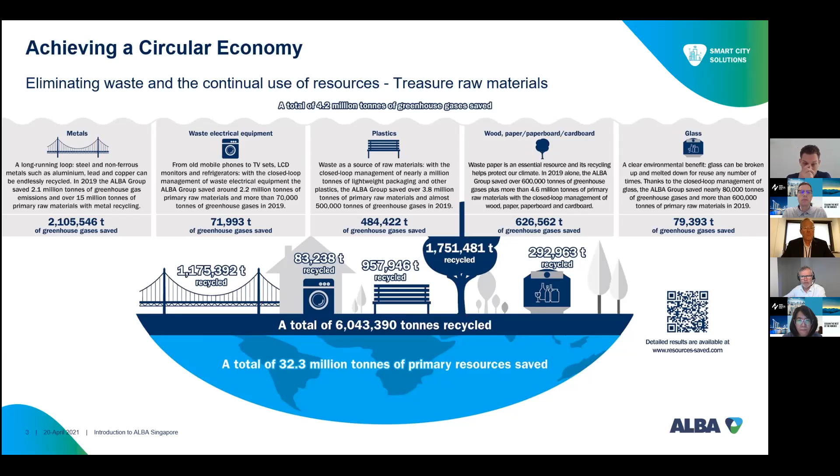And we see a trend towards sustainability, towards recycling more and more across the industry, across governments, and especially now in Asia. This is something we always like to highlight. Next slide please.

Specifically in Asia, we currently focus on 4 verticals, or business units: hazardous waste treatment, bio-waste treatment, plastics recycling, and what we call smart city solutions, which includes our Singapore operations. This isn't holistic - it's not the whole of what we do in Asia; we also do municipal waste treatment and end-of-life vehicle recycling, or automobile recycling. But these are the 4 core business units we're focusing on at the moment, where hazardous and bio-waste are currently mostly focused on China.

Plastics recycling facilities are being set up in Hong Kong and Japan, with plans to expand into other regions in Southeast Asia such as Indonesia, Vietnam, and Singapore. These first three business units are very much focused on recycling. These are all recycling plants that we operate, where we may have a collection infrastructure around that, but it's all focused on collecting the material and recycling it, then selling the output material produced from these three waste streams.

Finally, we have smart city solutions, which is broader. On one hand it includes all of our collection activities - sometimes we go into countries like Singapore and set up a collection network first before moving into treatment. This can be a first step, but it also focuses on our digitalization efforts, innovation, and anything we can do to modernize waste management and recycling processes as they had been used in the past. It also includes, for example, our newest project in Singapore, the producer responsibility scheme, where we manage the whole electronic waste landscape for all of Singapore. So that also falls under smart city.

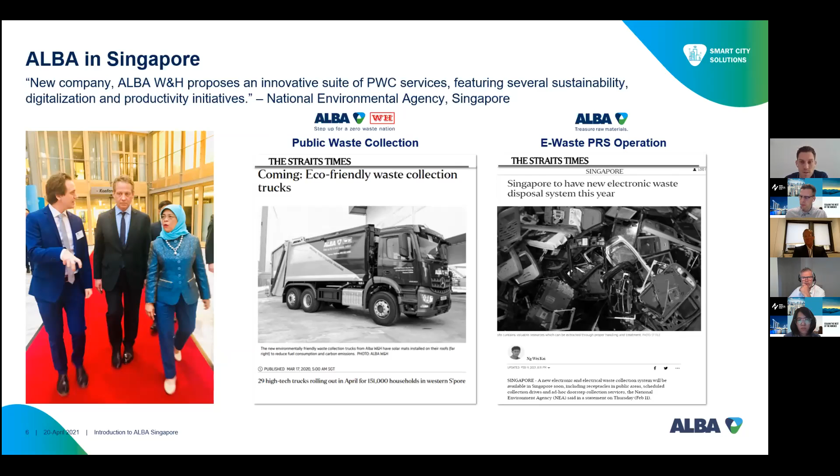Next slide please, Amirul. I won't go into too much detail, but this is the e-waste scheme - you basically just see what we are responsible for.

Producers sell to consumers. At the end of life, we have all of our different collection schemes, be it bins, collection drives, working with retailers, special events, so-called cash-for-trash events, and so on, to collect back the material, bring it to our hub, categorize it, weigh it, sort it, and then bring it to the different types of e-waste recyclers who specialize in all the different categories. And of course we also have to audit and consult them to make sure all hazardous materials are handled in an environmentally safe and friendly manner.

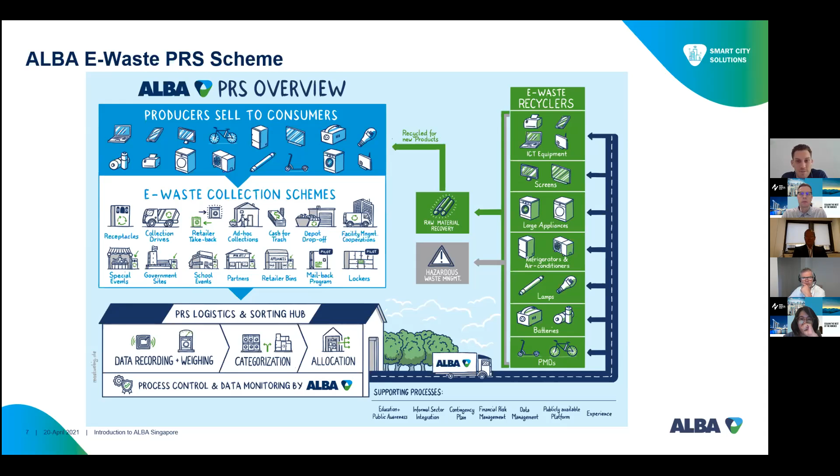That's in a very, very short just that project. Next slide, please. Okay, public waste.

I also talked a little bit about this. One thing that's important to mention again is that we really want to differentiate ourselves, certainly from the current landscape here, but from other waste management and recycling companies in general, by using new technologies and by making our own operations as green and sustainable as possible. So we've come up with a couple of innovations on the hardware side for our fleet.

All of our Euro 6 diesel trucks have solar mats on their roofs to harness solar energy, and we save about 5% of fuel consumption.

We have air filters on our trucks which take in the surrounding air, filter PM2.5 and PM10 particles, and then emit clean air. Finally, we have digital displays on our trucks, which in Europe are used for advertisements, but we use them for sustainability and recycling messages, and to create awareness for our recycling efforts.

And finally, on the next slide, we have developed an app that incentivizes recycling for Singaporean residents. We are expanding this as we speak. Starting 1st July, we will go island-wide. At the moment, it's only available in the sector where we do public waste collection.

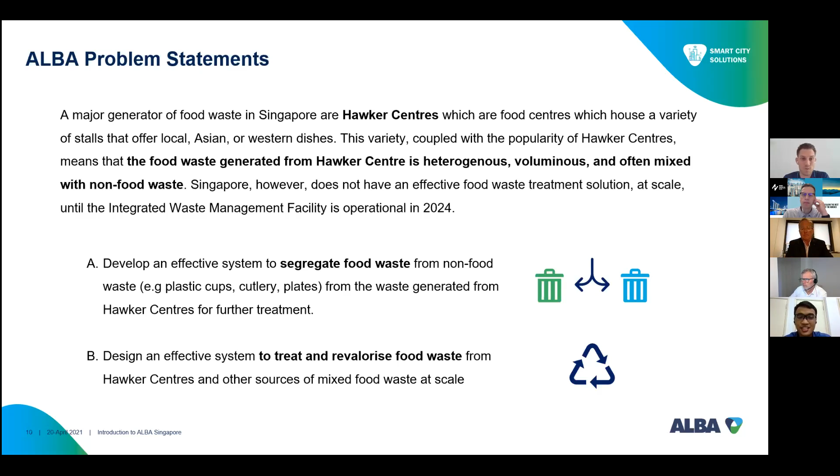To add on to what Amirul mentioned, the Singapore government is planning to build an integrated waste management facility that will probably come up by 2024. Leading to that, as a public waste collector, we would be forced to collect segregated food waste from major producers before this facility is ready. That's where the challenge begins, because first we have to collect segregated food waste. NEA has mandated that we provide separate bin units, which are brown in color, and educate hawker centers on proper segregation. But on top of that, we have to come up with an interim solution until the facility is up on how to treat this food waste. So that's another problem statement we're having.

One reference case we mentioned is the one we have in Berlin, at the city center, where we have this Potsdamer Platz facility, which takes care of almost 34 restaurants, 2 cinemas, many casinos, event spaces, and so on. The facility takes the waste underground, creating an invisible waste treatment, supply, and disposal center, and here we are also collecting food waste. We have a mini dehydration unit that receives 5 tons of food waste, which is fed into a dehydration and grinder unit that produces 3 fractions: the dehydrated food fraction, the water fraction, and the oil fraction. The food fraction is sent to biogas plants, the water fraction is purified up to sewer standards, and the oil fraction is sent to biodiesel facilities. So we are looking at innovative concepts like this that can be adopted in Singapore as well.

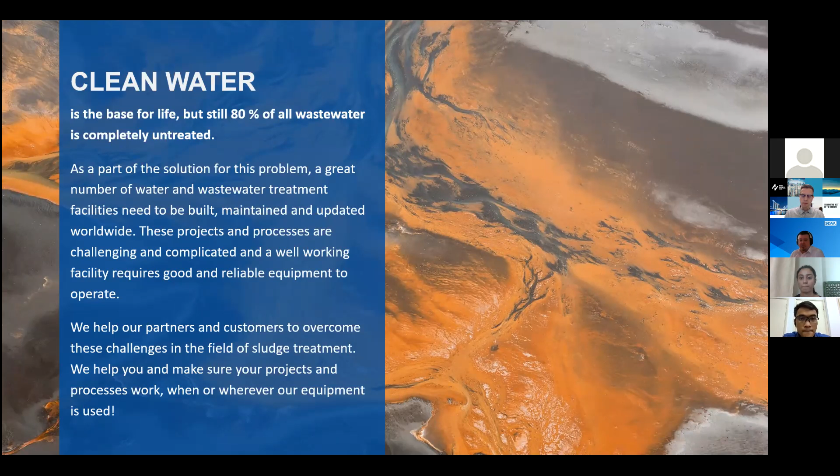Hello, my name is Toni Franti from Dewaco Limited. Thank you for this opportunity to present our company and offering. I'll begin with a short introduction. Clean water is the base for life, but still 80% of all wastewater is completely untreated. A great number of wastewater treatment facilities need to be built, maintained, and updated as a partial solution for this challenge. Good and reliable equipment have a very important role in this, and this is where we can help.

Under our DEWA brand, we design, manufacture, and sell equipment for sludge thickening, dewatering, and sludge removal. Effective sludge collection and dewatering is important in the fight to stop climate change and destruction of nature. It enables methods to reach sustainability goals and leads to circular economy by offering an alternative source for energy and other uses for the dewatered sludge cake. At least the collected matter is not directly released into nature.

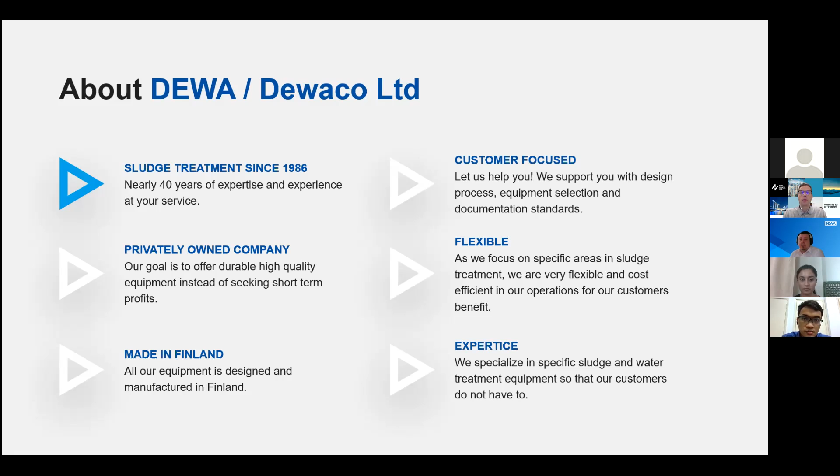We have 35 years of experience in sludge treatment. We specialize in manufacturing high-quality equipment that works as designed and promised, and we also offer supervision, installation, and after-sales services. Our equipment is made in Finland, and we operate under ISO 9001 standards. Our operations are based in Finland, but in many locations we are able to support our customers through our partner and reseller network.

For sludge and scum collection and removal, we offer chain and flight type chain scraper systems. These are the most sophisticated systems for sludge and scum removal. Our scrapers offer great benefits: optimal and minimum land and space use, higher removal efficiency, low capital and maintenance cost, and easy installation. Our superior design and non-metallic DEWA components offer top-class features, performance, and durability.

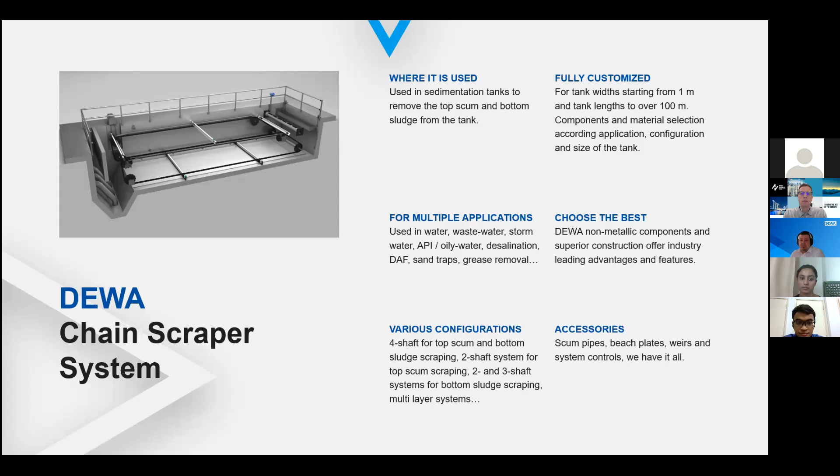These systems can be used in multiple applications such as water and wastewater treatment, oily water, desalination, DAF tanks, sand traps, and grease removal. We offer all possible configurations for rectangular basins, from top and bottom scraping to multi-layer systems, and supply all the needed accessories for these systems, including scum pipes, beach plates, and system controls.

In sludge thickening and dewatering, our solutions are based around belt filter presses and gravity belt thickeners. Belt filter presses offer great advantages such as low energy consumption, suitability for various applications, and relatively high sludge dryness. Total lifetime costs are extremely competitive.

Investment, running, and maintenance costs are low, and the presses have a very long lifespan. Reparations are rather easy, cheap, and do not require long standing times.

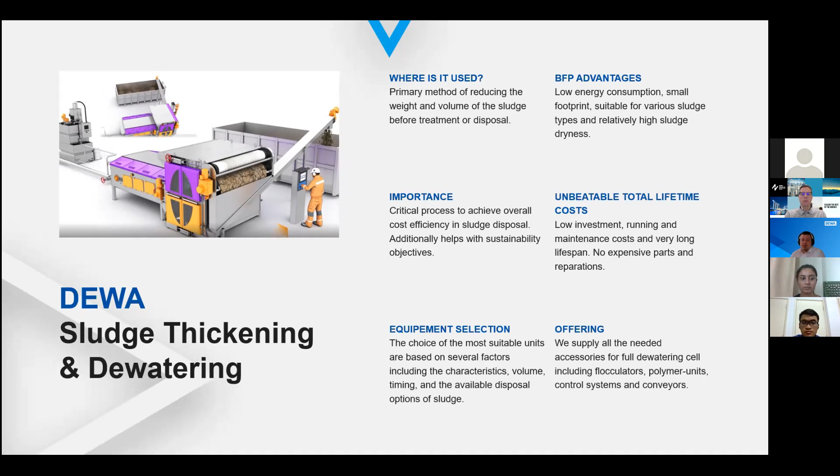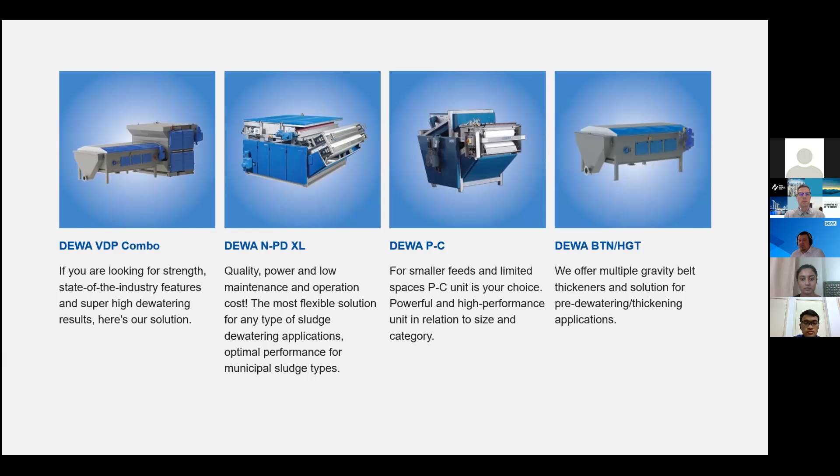Our portfolio covers solutions from small scale to high capacity municipal and industrial projects, all alternatively from cost-effective solutions to industry-leading features. We supply all the needed accessories for full dewatering cell, including flocculators, polymer units, control systems, and conveyors.

We are continuously developing our products. One of our ongoing development projects is to bring cloud-based and AI-assisted monitoring to our systems. This offers various benefits, such as decreased power consumption, extended system lifetime, and overall process optimization.

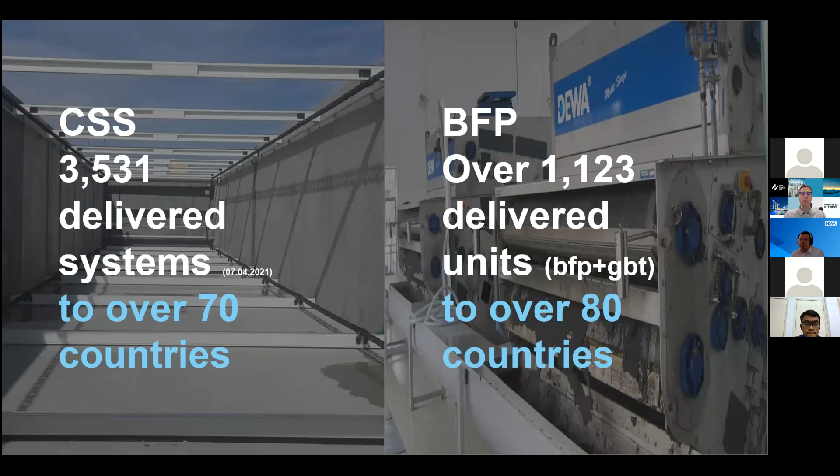Our track record includes over 3,500 chain scraper systems and over 1,000 belt filter presses and gravity belt thickener deliveries to over 80 countries. Next, I will show a few example cases.

Langat Centralized Sewage Treatment Plant in Malaysia is a mega project treating wastewaters coming from nearly a million people. For this project, we delivered 96 chain scraper systems and 48 scum pipes.

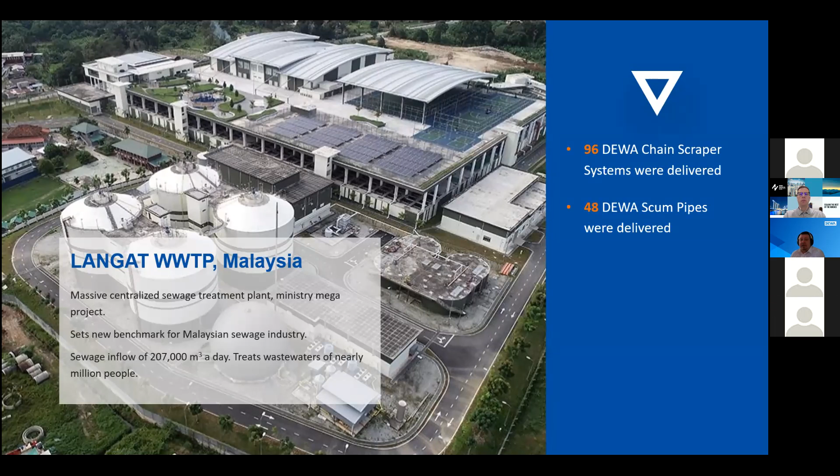Camana Sewage Treatment Plant is Maynilad's mega project in Philippines that will treat wastewaters from about 1.2 million households. Our full product portfolio will be used in this project for sludge and scum removal and dewatering.

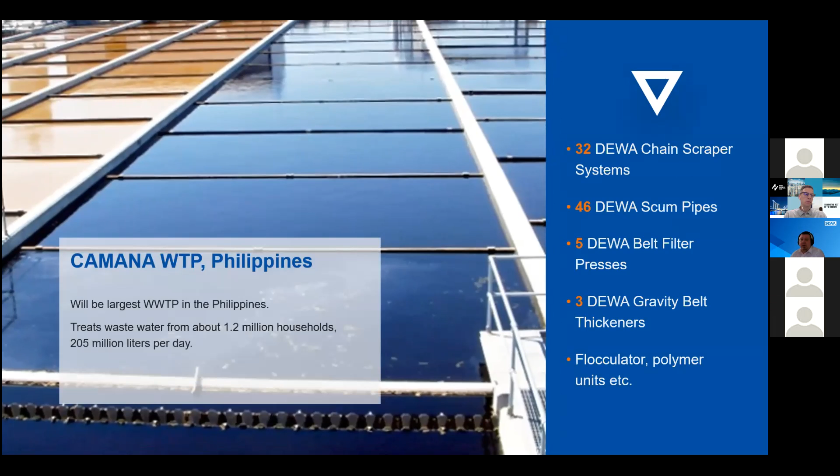I have our biggest and fastest growing market, China, as an example of a specific market area. I selected Wenzhou Wastewater Treatment Plant as an example case. For this challenging project, we delivered 24 two-layer chain scraper systems that help to solve the challenges with space limitations in a partly underground plant construction.

In order to showcase the business opportunities that our equipment offer, I want to mention Atal Engineering. Atal is one of our 6 resellers in China. This huge company is one of the leading Chinese electrical and mechanical engineering groups.

They began as our customer in a contractor role as they needed equipment for their own projects. Based on the successful and profitable projects, they have developed DEWA chain scraper systems and related services to be one of their actual business lines, stretching outside the typical contractor role.

We know that it takes much more than just good equipment to make the customer happy and reach a successful delivery project. Good products, overall quality, know-how, flexibility, accuracy, honesty, and right attitude are all needed to establish trustworthy partnership. Choose DEWA for smoother projects, better processes, overall cost savings, and cleaner future.

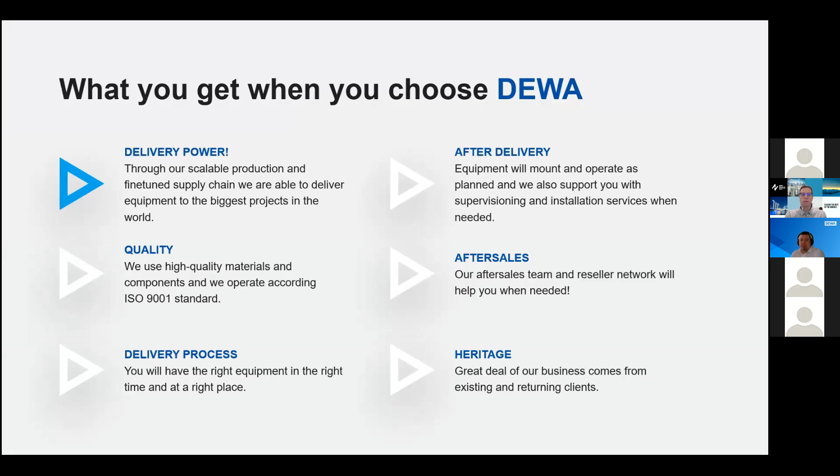We want to find new business opportunities, and we believe that many companies operating in this field can benefit from our offering. We can operate directly with end customers, but typically cooperation is done with contractors. Most importantly, we are looking for resellers to be our local partners. For this, we have great needs in Southeast Asia and in Singapore.

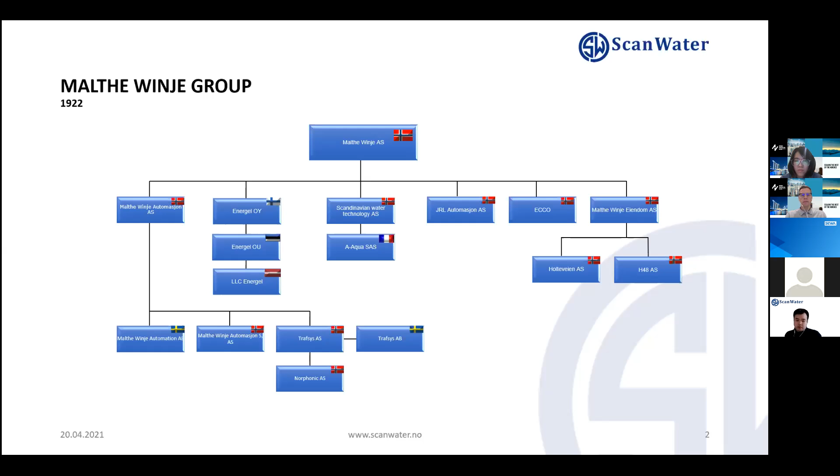What does Scan Water specialize in providing? We provide solutions in humanitarian aid and also municipality preparedness and water solutions. We developed together with the university within the CU Green project, a Horizon 2020 project. Increased urban population imposes higher environmental challenges to modern cities. At the same time, cities must optimize well-being and minimize environmental impact. In addition, through the current handling of organic household and toilet waste, on the one hand valuable resources are lost, and on the other hand it stresses existing infrastructure solutions.

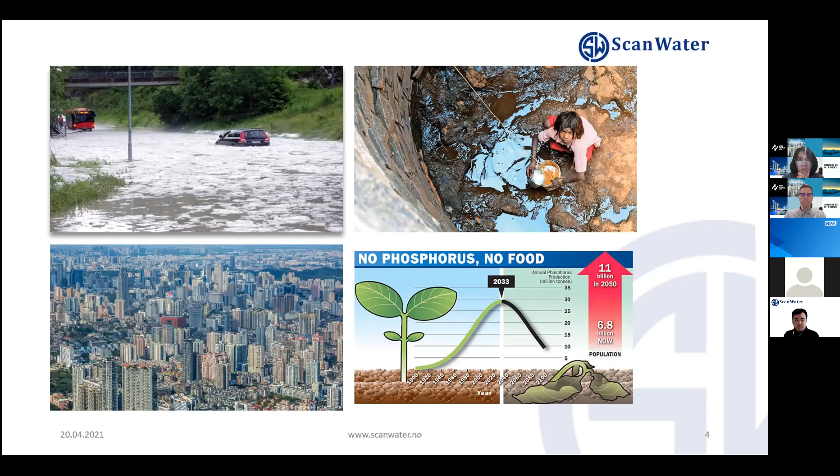But also, if not treated properly, it contributes to environmental pollution. So Scan Water conducted experiments on the development of an innovative water management solution called Greenergy. This Greenergy, under the CU Green project as mentioned, is a smart green solution for integrated water and sanitation, stormwater management, energy supply, and nutrient management in the city, based on the principle of resource recovery and safe reuse, aiming to increase the resilience of the city. It makes urban development more climate, environment, and human friendly with nearly zero emission, circular economy, low climate, and water footprint.

Elaborating a bit on the building infrastructure: Greenergy will reduce water consumption by using water saving fixtures such as vacuum toilets and reuse grey water source. It facilitates the recycling of nutrients to urban or peri-urban agriculture, and also eliminates pollution of surface water. Integrated with a biogas reactor, it will allow biogas production from toilet and organic household waste, delivering heat and power, and also nutrient retention to support greenhouse food production.

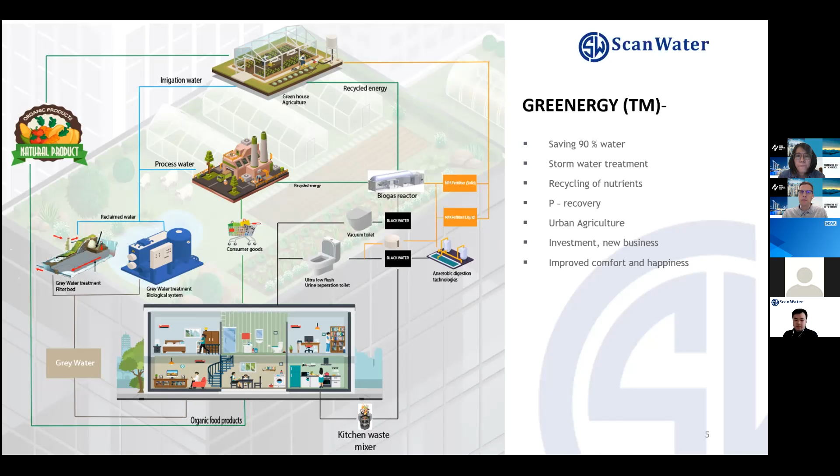The innovative element of Greenergy is the well-balanced combination of technology and social innovation that facilitates reduced water consumption, minimization of greenhouse gas emissions, and the promotion of reuse of CO2 and waste-based nutrients in the local greenhouse. So far we have pilot projects in different locations: 3 in China, with 2 projects in Beijing and 1 in Changsha, as well as one in Norway. We are looking for local partners who can develop the local market together with us. Thank you for that, that's my presentation.

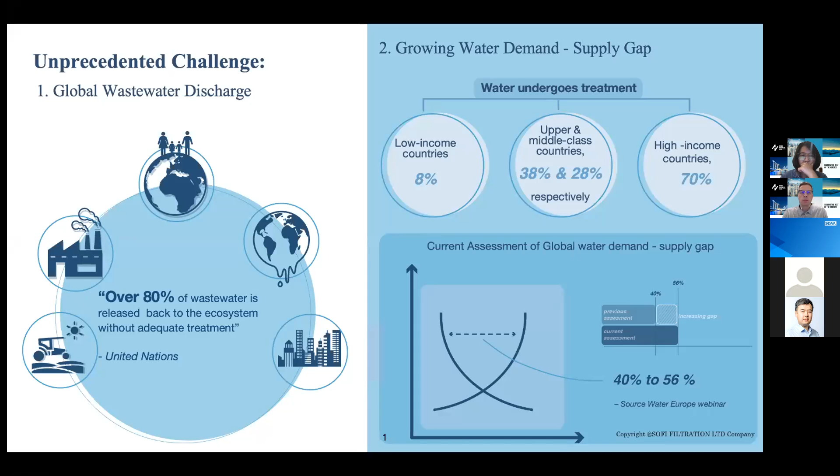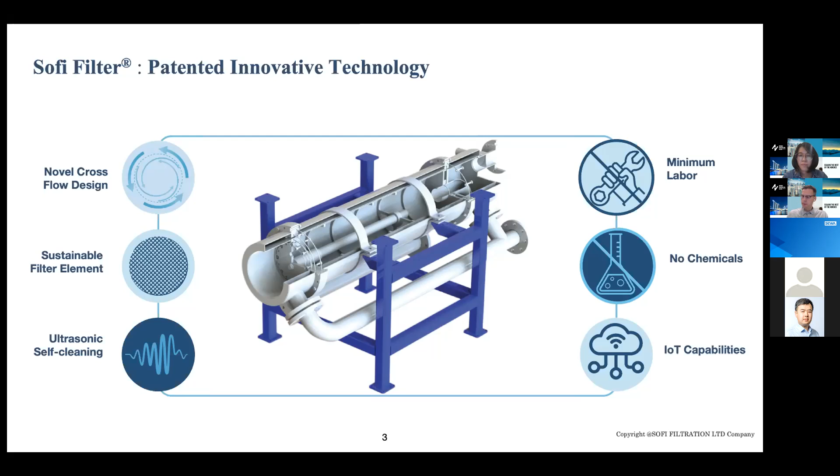Our technology has 3 unique features basically, and that's how we stand out from the other existing technologies in the market. We have the novel cross-flow design that accelerates the water inside the filter element. Then we have the sustainable filter element, meaning that we are using long-lasting filter elements, not any disposable cartridge filters inside our filter elements. And then we have the ultrasonic features, which automate the self-cleaning, meaning that we don't require any chemicals to clean the wastewater - so the only thing that runs inside the filter is water. We have also incorporated IoT capabilities to make our system more hybrid.

So this is the basic architecture of the remote monitoring and control I was talking about earlier, the IoT capabilities. The Sofi system is integrated with IoT features, and the system itself is connected to the wastewater treatment plant. With the help of that, the client and also us are able to monitor the data remotely, no need to be on site. So offline also it could be monitored.

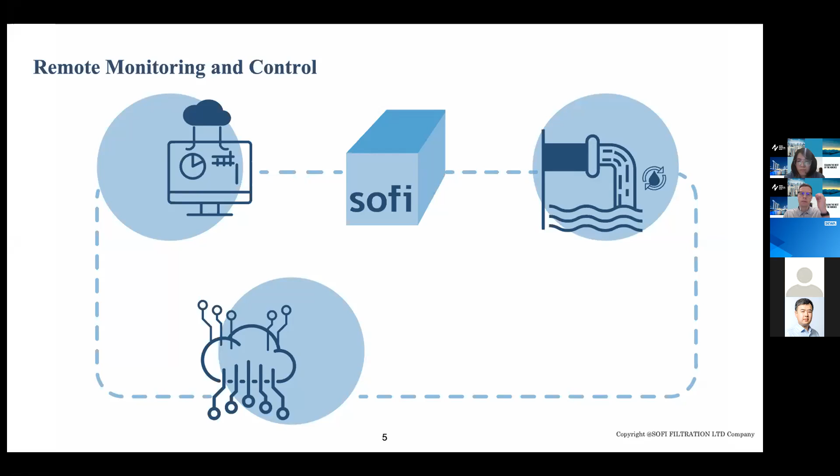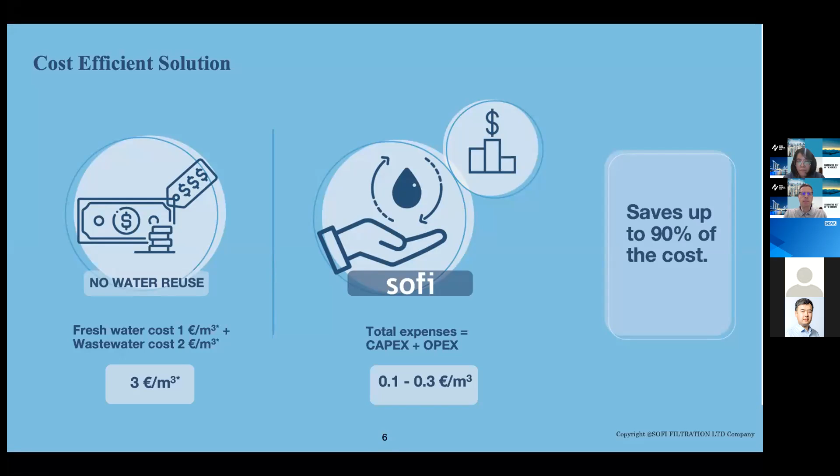Now I'll go with the cost-efficient solution. Our system is highly economical as well, not just sustainable. On the left, we have no water reuse, this is the Western tariff rate. Freshwater costs €1 per cubic meter, and for discarding wastewater it actually costs more, which is €2 per cubic meter, so in total it becomes €3. Using our filters, companies are able to reduce the cost up to 90%.

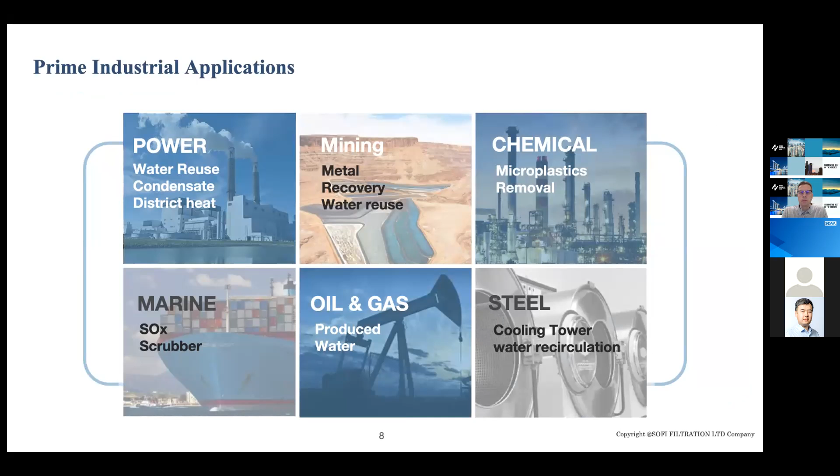We primarily deal in the following areas: power, mining, chemical, and marine industry. We have experts in mining, our CEO and also our R&D director, which I'll talk about later in the slide. But we also have steel industrial applications, and here is our team.

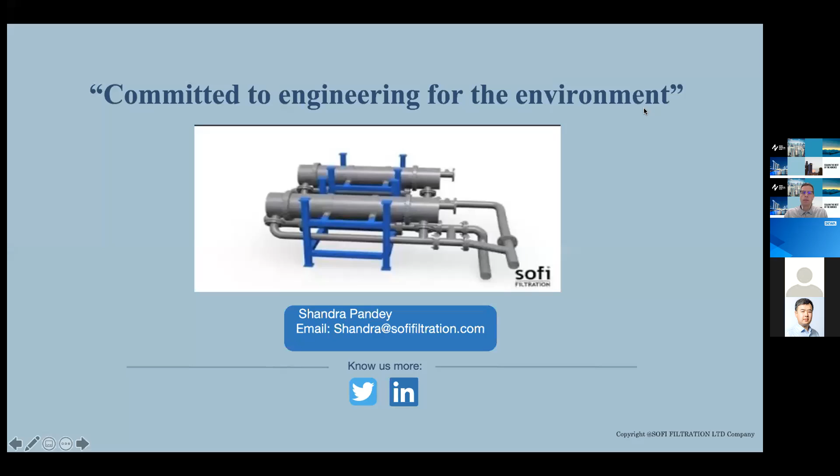Our offices are located in Espoo, Finland, and Houston, Texas, and we have partners in Canada, Spain, and Poland. And yeah, this is all from my side. Thank you everyone for listening.

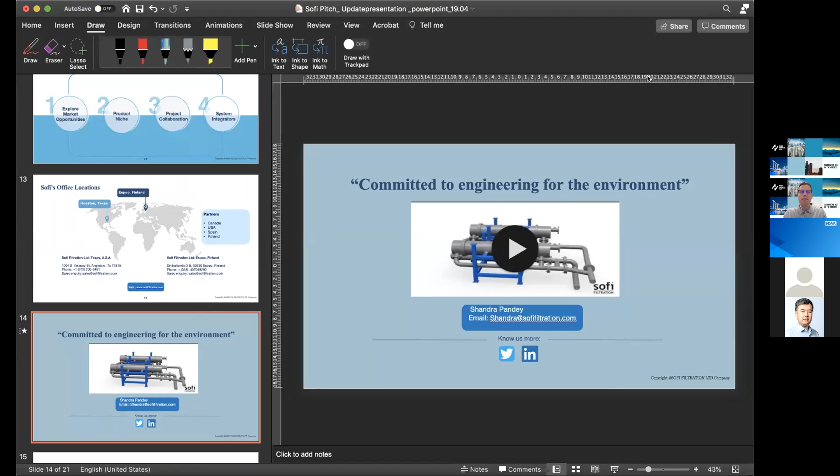So my name is Heli Kairala, and I'm working as a business manager in company Valmet. Together with my colleagues from the Valmet Indonesia office, we are participating in this event.

What is happening? Okay, Valmet is a global technology company. Last year, our net sales was 3.7 billion euros. There are over 14,000 professionals working globally. Wastewater is one of the growth areas for Valmet Automation business line.

There is a lack of accurate and reliable real-time measurement and optimizer applications, especially for the wastewater sludge process area. Sludge process is very challenging for real-time measurement because there is typically that much air, debris, and grease in the process.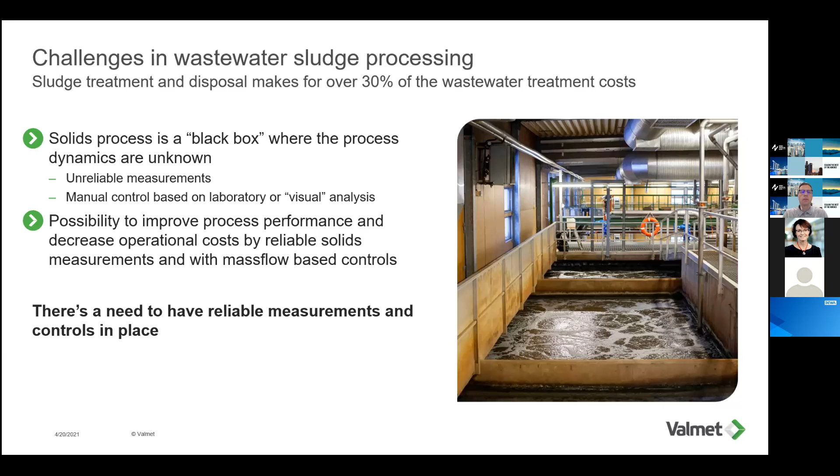Based on end customer feedback, about 30% of the wastewater plant operational costs come from sludge processing and sludge further processing costs. Because of the lack of reliable real-time measurement and control solutions, it is very typical that processes are controlled based on visual look and based on laboratory analysis manually. So there is really a place for real-time measurements and controls.

Valmet has an offering for this need. Based on over 50 years of measurement technology development, what Valmet has done, especially in the pulp and paper business area, we have advanced industrial quality measurement technology offering for the wastewater sector. It is important that we have not only moved this technology from the pulp and paper sector, but we have further developed it so that it really fits this wastewater area.

We have over 2,000 real-time measurement references available with excellent customer benefits. In order to get full benefits of the real-time measurements, we have also developed a sludge dewatering optimizer application, developed especially for the centrifuge process area.

Valmet DNA automation systems include process automation, information management, environmental reporting, and condition monitoring. Of course, we have a wide range of processes where Valmet DNA is used, in the energy sector as well as in pulp and other process areas.

For Valmet, it is important to support end customers via services during the whole life cycle in order to reach the best performance. Valmet industrial internet solutions are an important part of our offering as well.

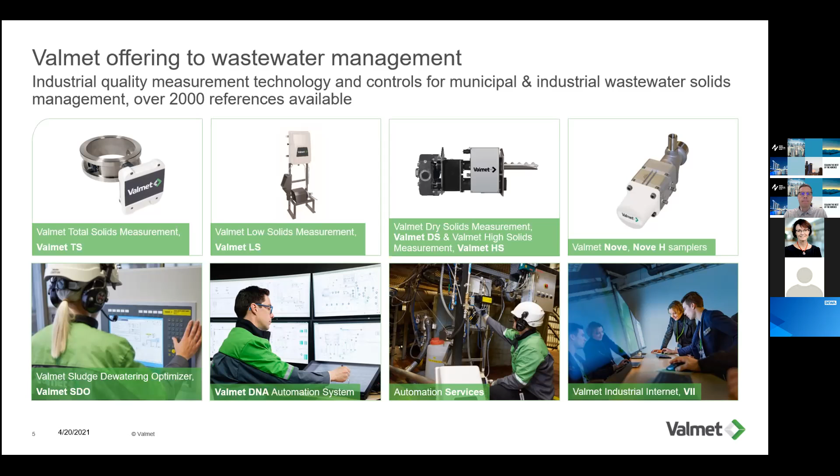Valmet solid measurements are specially used at the wastewater plant sludge process area, where we can cover all the solid measurement need. These solid measurements are used outside wastewater plant processes as well. I will show one example of those later.

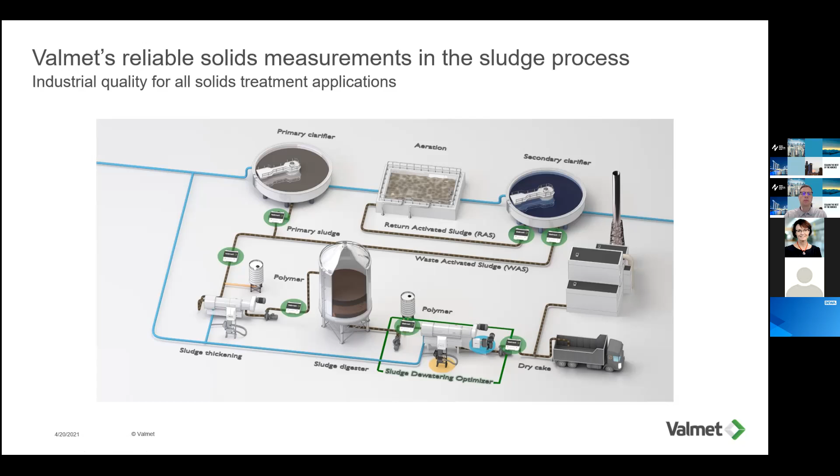The Valmet industrial internet solution combines advanced monitoring of the plant, data-driven optimization, and remote services from the Valmet Performance Center into comprehensive solutions. The purpose is to efficiently utilize data and Valmet expertise to provide tangible benefits for our customers.

We have documented reference cases available, and I will highlight 2 cases now, coming from China. In China, we have nowadays over 200 measurement references available, and this is a case from Shanghai Taihe wastewater plant. Last year they ordered 8 unit solid measurements for the primary sludge area as well as the sludge dewatering area, in order to increase the performance of the wastewater plant.

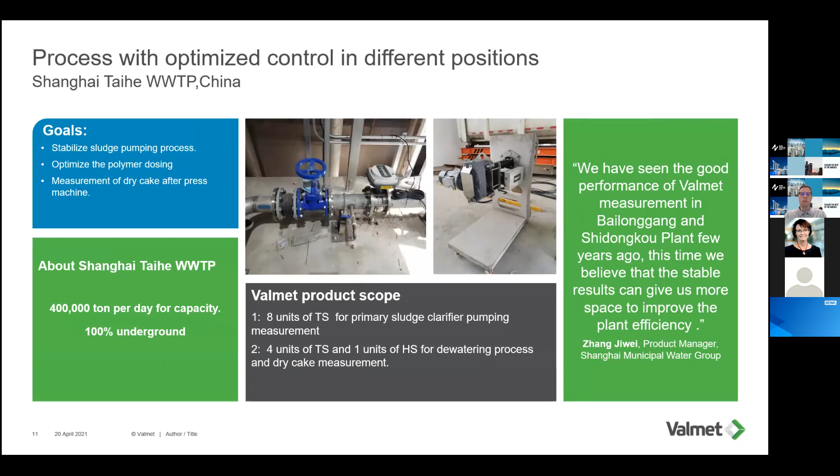The other case I'd like to highlight today is a Valmet case in Hong Kong. In that plant we have 6 pieces of our real-time measurement available, and this is actually a very big plant, the world's largest sludge treatment plant in Hong Kong. So this application can be used outside the wastewater area as well.

Generally, our customers have reported big savings, and of course these savings depend on the size of the plant. For example, in the USA, one plant reported $1.2 million US in savings annually, along with an increase in performance. Payback time can be as short as only a couple of months.

In the Singapore area, we have reference cases available as well, but they are still in early phases, so the reports will be done later.

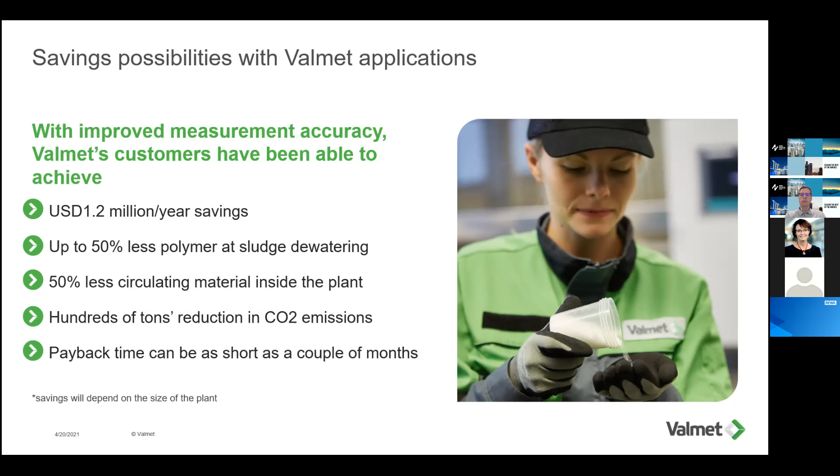In this Nordic Innovation House event, we really want to show the benefits of our solutions and find new business partners, new customers, operators, EPC distributors, engineering offices, and service providers in Singapore and throughout the whole Southeast Asia area.

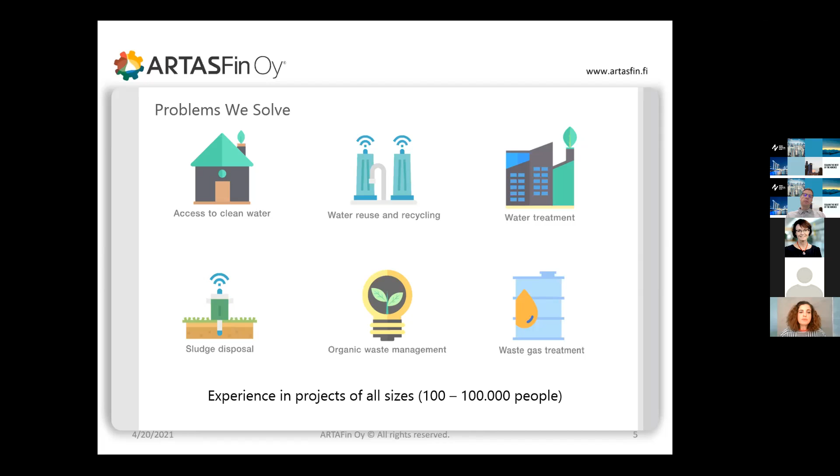Our philosophy is providing integrated, modular, customized solutions for energy. We drive change towards circular economy.

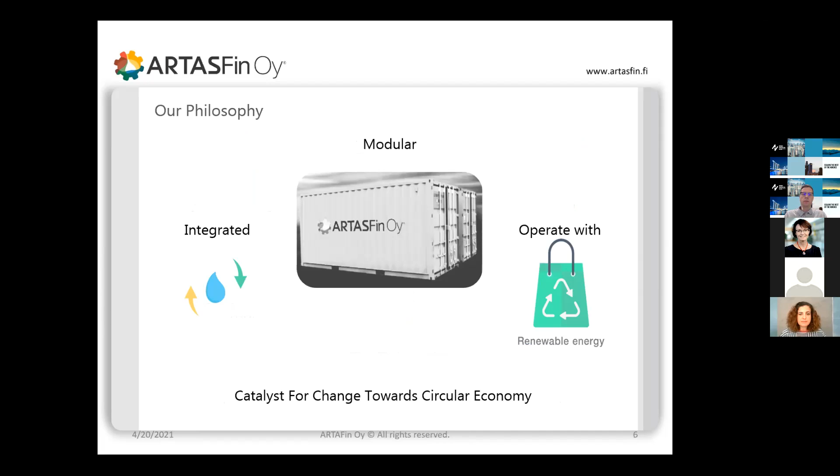Our products include Arto reverse osmosis unit, ARUF ultrafiltration, ARMO mobile ultra-pure water treatment plant, ARPAC activated sludge-based sewage treatment system, ARMBR membrane bioreactor-based biological wastewater treatment system integrated with solar panels, KIMPAC chemical wastewater treatment system, RDES chemical and biological desulfurization and flue gas treatment system, ARMUT compact and modular.

As an example of our integrated and holistic approach, this is a 5-star hotel resort where there is limited road access. We developed a standalone solution.

We treated the wastewater for recycling. We took the sludge, gardening wastes, and together with the biodegradable kitchen wastes, we fed them into our compact digester, which generated biogas. The generated fertilizer at the outlet is completely safe to be used at recreational areas of the hotel.

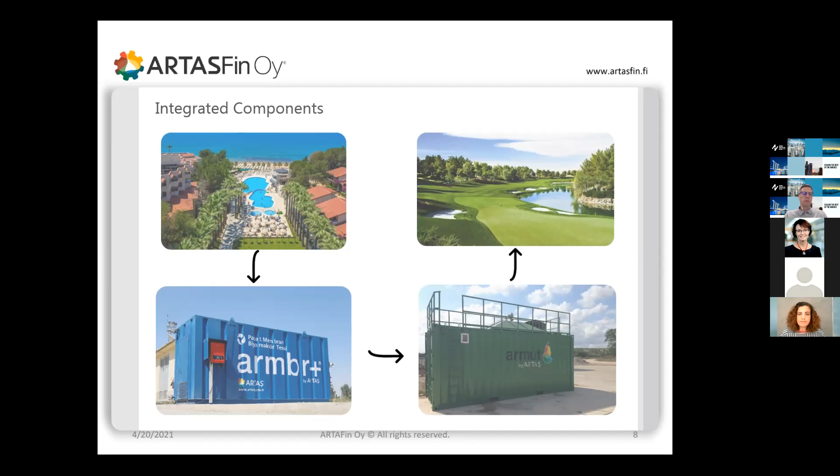With our ARMBR solution, we provide very high quality treated water that can be reused for many purposes. When integrated with solar panels, the system can work as a standalone solution in remote areas.

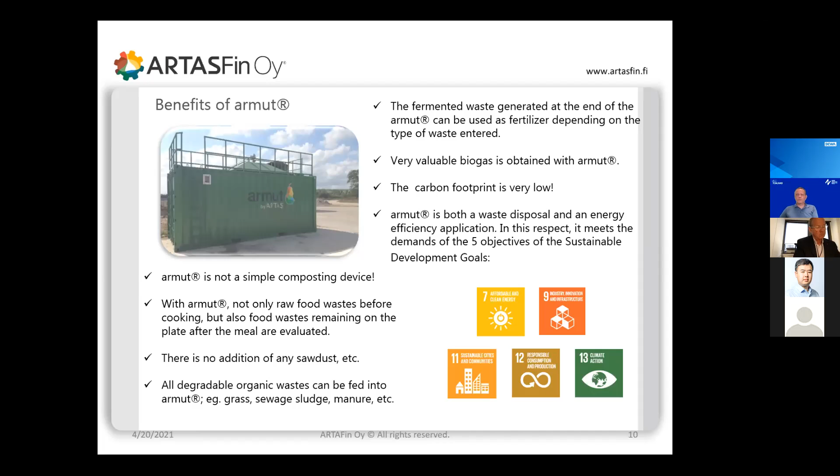We have mobile water treatment systems named ARMO. ARMO is ultimately designed as a plug-and-play system. It meets either potable or ultra-pure water needs and can be easily relocated and deployed from one location to another. It's a perfect system to meet urgent, unexpected, and instant water needs.

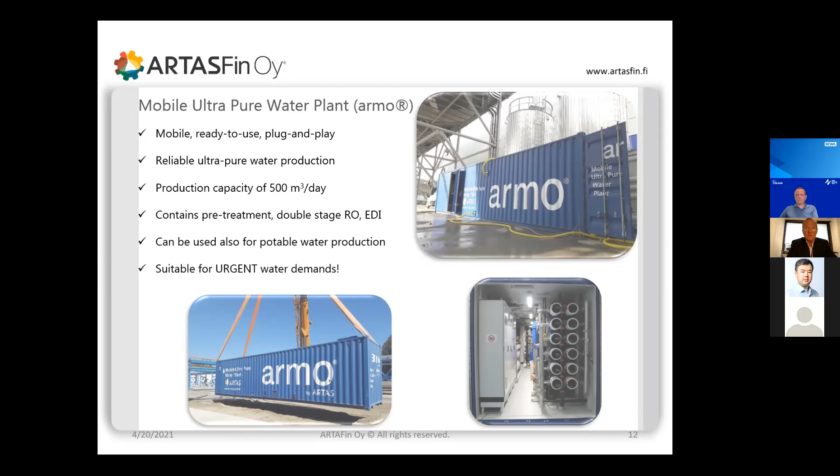We also provided containerized water treatment plants for the International Committee of the Red Cross in order to produce potable water in Juba, South Sudan. This project has potable water production at a capacity of 12,000 cubic meters per day, which meets the demand of 80,000 people living in the region.

That's a good example. Go beyond expectations with a fully containerized solution.

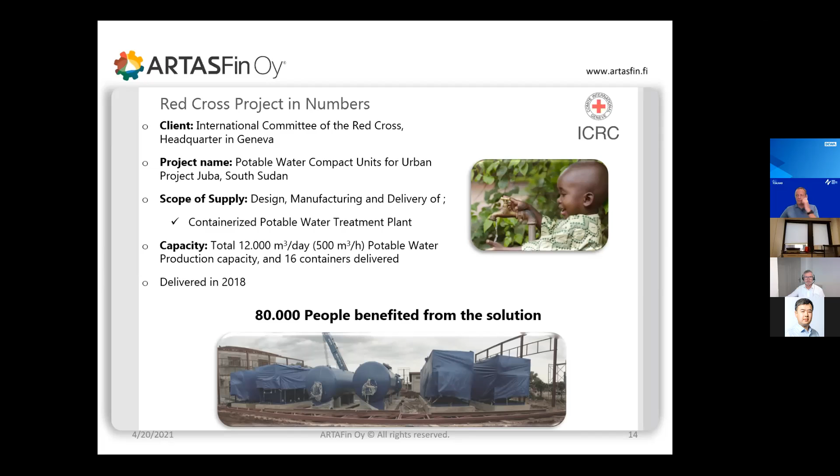As a stationary and integrated solution, I would like to give the example we delivered to POSCO. We delivered raw water and demineralized water treatment systems together with industrial and sewage wastewater treatment systems, which were designed with MBR technology.

As I'm approaching the end of my presentation, I would like to highlight this municipal wastewater treatment plant. This plant was designed with fixed film attached growth activated sludge technology, using submerged plastic medium.

With this particular design, we treat the same amount of wastewater in one-third of the space needed for a normal activated sludge plant.

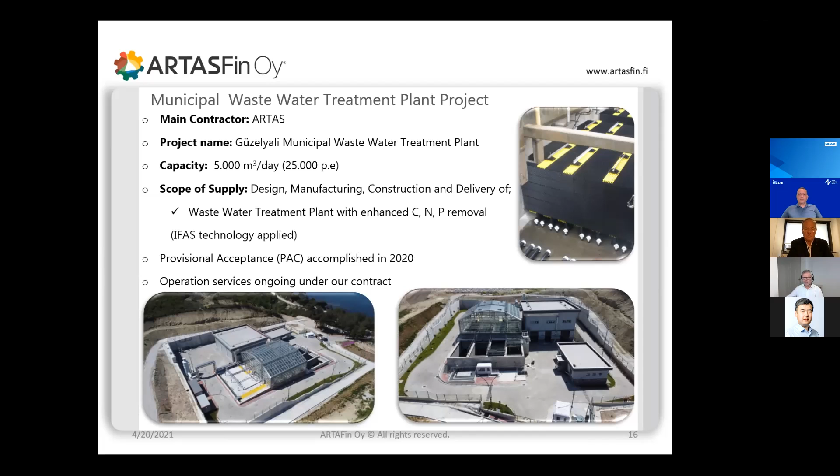We design, manufacture, implement, and operate fully integrated solutions without any third-party intervention. This is what sets us apart from other solutions in the market.

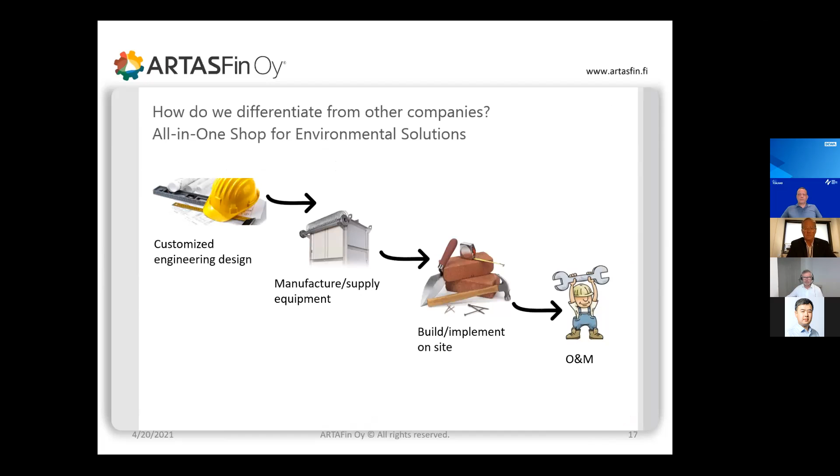Our edge allowed us to cater to a diverse portfolio of customers. We have designed and delivered solutions to international companies and NGOs globally.

We chose Singapore as a hub to scale up our technologies and operations in Asia. We see promising opportunities in the region. In Singapore, we have already engaged a local representative in Asia and would like to partner with prestigious entities both on the public, private, NGO, and venture capitalist space.

We are looking for opportunities to deploy our proven containerized and integrated solutions and partner with leading players for stationary solutions in Southeast Asia. We look forward to working with you. Thank you.

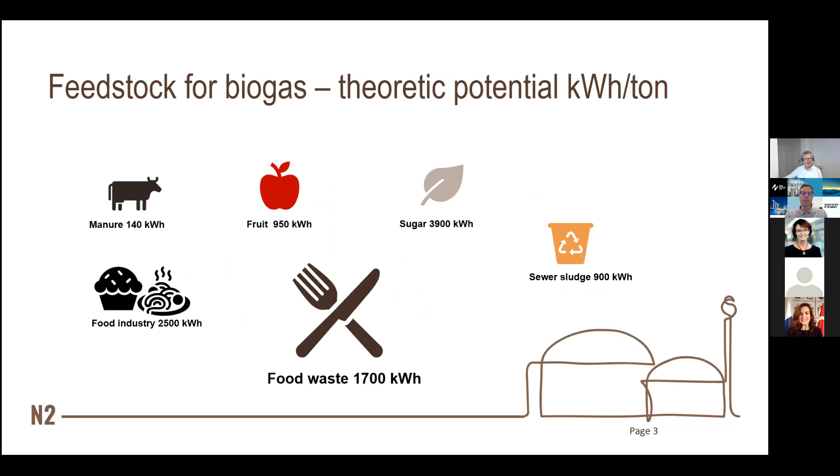In Singapore, we see that there is a waste problem. Food waste alone accounts for 750,000 tons, and if that was processed through a biogas plant, it could potentially generate 1.25 terawatt-hours delivered to the grid. So these are problems we can collaborate on, helping Singapore get rid of the waste and deliver power to the grid.

At the same time, with our plasma unit, we can create a supercharged nitrogen-enriched organic fertilizer, which we refer to as NEO, from the digestate. That can be used in Singapore and beyond for rooftop farming and other fields and greenhouses, while minimizing greenhouse gas and pollution.

When looking at biogas plants, we use some of that electricity to operate the plasma unit. That is the only OPEX going into the plasma unit. We take in the air, split the nitrogen and oxygen, and then create the NEO.

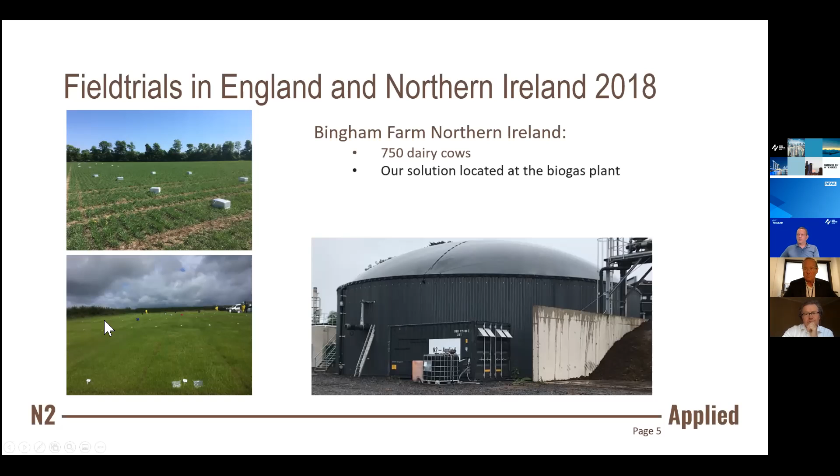We did several field trials in 2018, and these are just some photos from Bingham Farm in Northern Ireland, where they have 750 dairy cows and a biogas plant in operation.

Our main drivers, and it should also be for Singapore: globally, there is a growing population. We will also need to honor the agreement from Paris, targeting a reduction of emissions. And obviously, locally in Singapore, we are looking at reducing the waste generated.

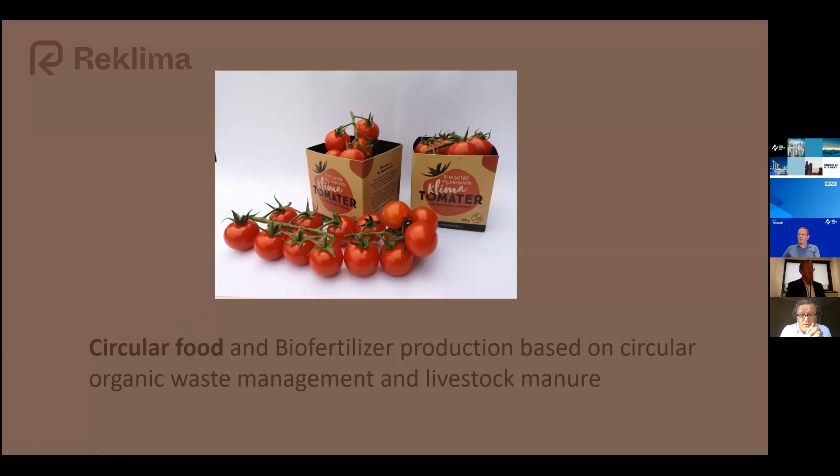It was very interesting to see that food waste is also a challenge here. In Reklima, we have since 2011 worked with a solution to take the best out of technologies to develop a circular food waste treatment. Next, please.

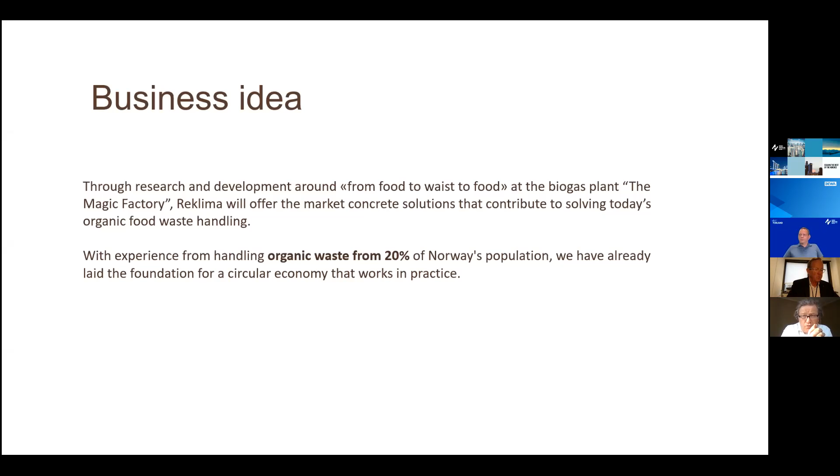Today we have a business turning about 150,000 tons of biomass into our plant, which gives us 20% of the population of Norway treated. In this solution, we try to do the best of all the solutions for the biogas factory, for the greenhouse technology, and also the greenhouse growing equipment.

We use all the elements out of the biogas product in a production system which gives us fuel for the trucks, food for the people, and we use no fertilizer or chemical treatment. We use the word 'gaming' - as you see in these sketches, we have the householding people, and we use gaming as they give us their food waste, and we give them food and fertilizer back.

I think your app would be a very good solution for us to use, because we are gaming with a population of about 1 million people now to develop the sorting rate, which today is about 70% sorting rate in our area.

Next, please. To grow, we have developed our own technology for the fertilizer, for the soil, and for the growing techniques. And we use worms to stimulate these processes.

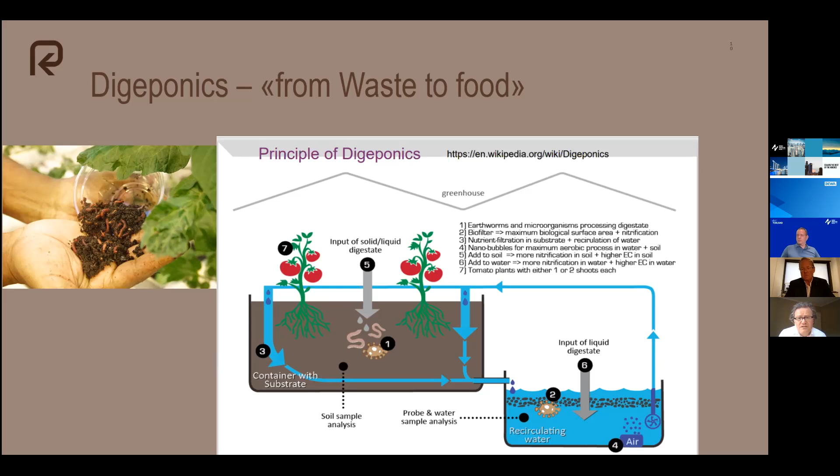We are an R&D company owned by two waste companies. What we do here is develop solutions that are going to be industrialized in a big greenhouse over the coming two years. Thank you.

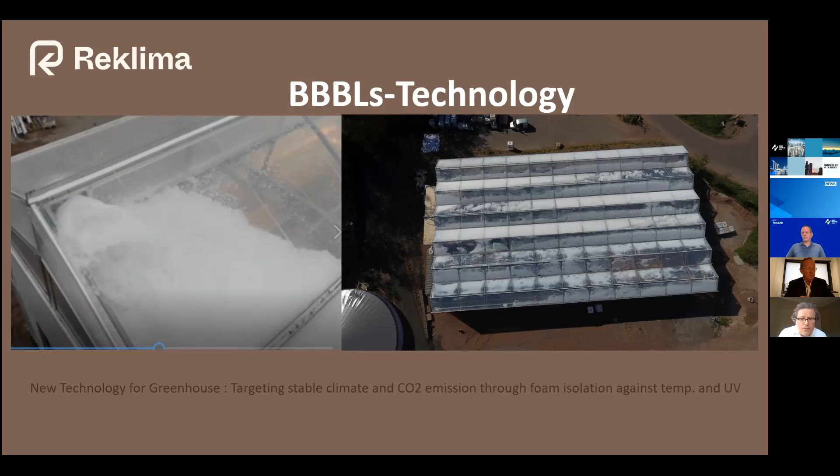Technology-wise, we are developing a solution for a circular, climate-friendly way to use a greenhouse. We use bubbles in double walls to reduce UV and balance the climate inside. We are able to catch the CO2 from biogas production, take that CO2, and use it for growing stimulation for the plants - today, tomatoes - which we sell to the grocers.

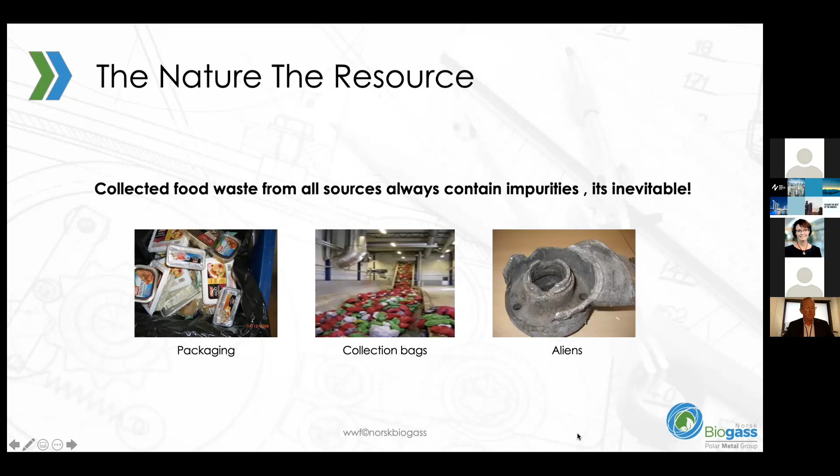Contamination is the problem. The end product from pre-treatment of food waste is an energy-rich slurry we normally refer to as substrate. Through the biological process in the digester, biogas and digestate is produced. Beside that, impurities in the substrate may cause processual problems.

It's the generation of the digestate that worries the most. Digestate is a first-class natural fertilizer where all nutrients are kept intact. It is obvious that a contaminated digestate neither will nor should be accepted in agriculture. Stricter standards are under elaboration, especially focused on problems that arise with micro and nanoplastics.

I have been with the recycling industry for more than two decades, most of them in the waste-to-energy sector. During that period, we have seen many different technologies and designs of pre-treatment systems in use. As far as I understand, there are two observations and concerns that need to be addressed in this context.

First, most, if not all, system designs are different. And second, the content of degradable matter that follows the reject due to insufficient separation is, in most cases, significant and reducing yield. It is reasonable to think that there over the years has been a lack of focus on pre-treatment in general, leading to insufficient solutions.

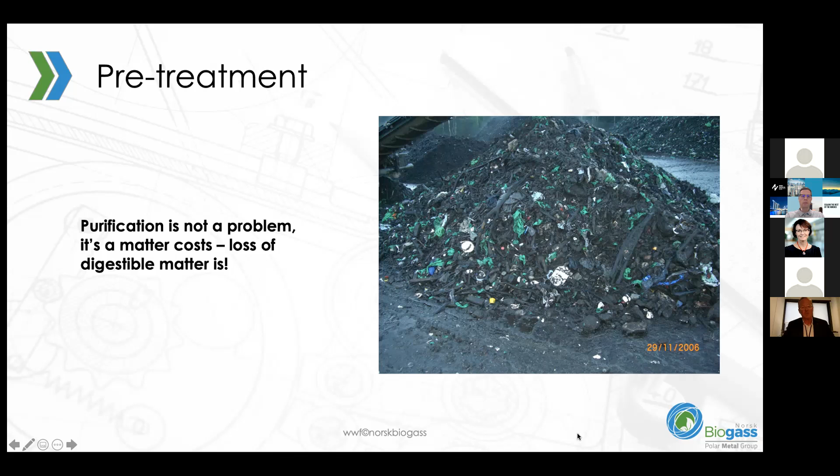The core of the system, the BioSep, has proven its efficiency and sturdiness over more than 10 years in operation. The machine works in a batch-driven process based on a patented centrifuge principle. As you can see from the prestanda, it is a multi-source machine with the capacity to process liquid and solid waste. The machine performs in 3 steps.

It's separation, reject cleaning, and reject drying. Since the separation steps do not involve any form of cutting or size reduction, the amount of microplastics is kept to a minimum.

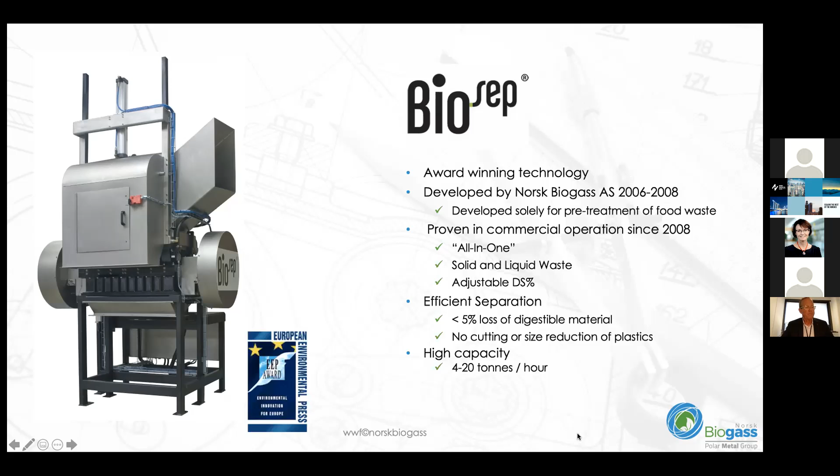We strongly believe in standardization. The fact that a fixed process design enables a more scientific approach in regard to development and trimming of the system. It enables exchange of data and data mining from all plants in operation, in addition to cooperation and training among operators of the systems.

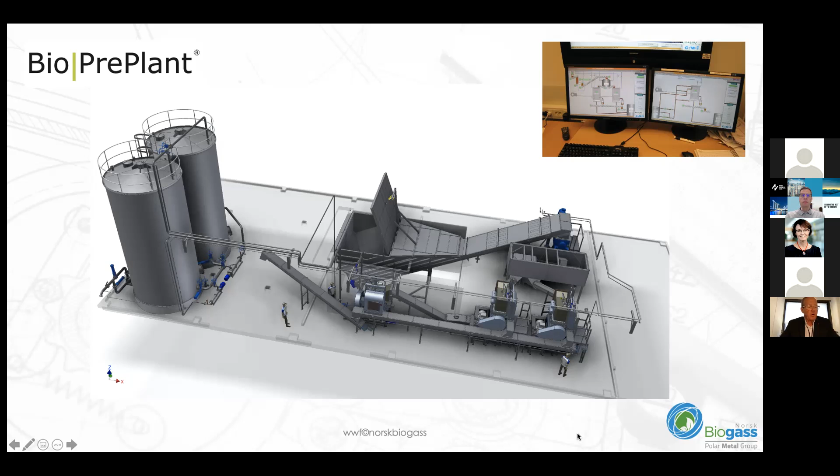The BPP system is fully automated and may be controlled remotely. As you see here, an average throughput in this configuration at one shift is approximately 20,000 to 25,000 tons yearly.

Until now, we have installed 7 pre-treatment systems in Scandinavia, basically at municipal-owned waste facilities. And I guess around 250,000 to 300,000 tons of food waste is processed annually.

Three of our installations are planning for extensions and multiplication of BioSep units this coming year. All plants are used as showcases and, to a certain extent, training grounds.

I presume you already know a little bit about our company. Let me just add a few things. Norsk Biogass was founded solely on the invention of the BioSep, with a focus on removing plastics.

The Bio PrePlant process design has been our way of thinking as a specialized company within food waste handling. Last year, we decided to involve ourselves in developing pre-treatment solutions for other complex waste streams as well. Through the cooperation with Polar Metal Group, we also get access to expertise and equipment geared to the dry part of the recycling industry. Altogether, this will enable us to develop further and give us direction for the coming years.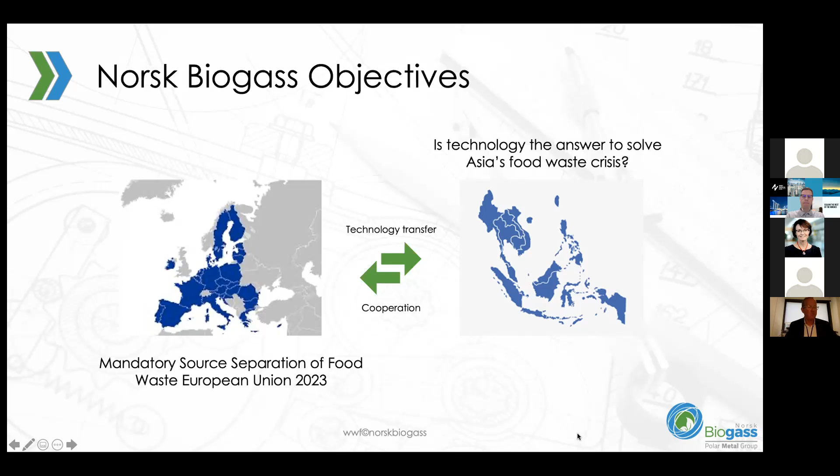To be able to operate in any market, in addition to the technical products itself, one needs marketing capacity and a sales force that can find and contract business opportunities. A strong engineering capacity is needed, basically within the discipline of process engineering. And finally, a financial capacity to meet tendering requirements.

Thank you very much for your attention.

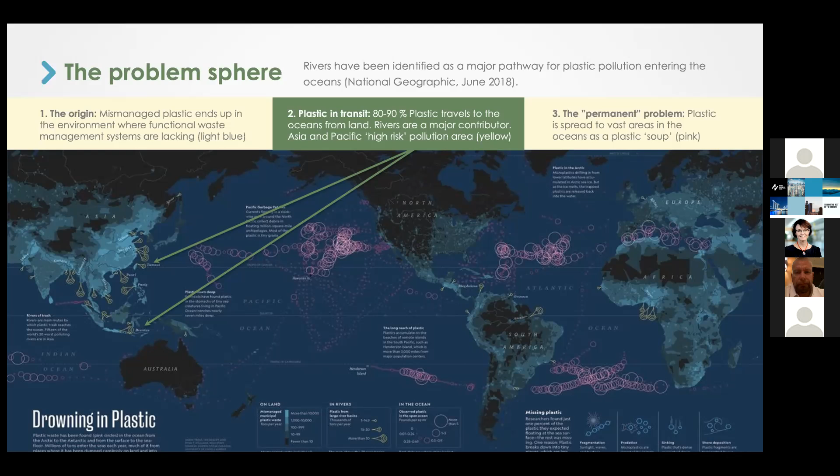A few words about the problem we're aiming to solve. This slide illustrates from which sources plastic waste ends up in the oceans. About 90% of all plastic waste that reaches the world's oceans gets flushed through the rivers: littering, windblown waste, industrial waste, and municipal waste. Once plastic gets into the sea, it decomposes very, very slowly. If current pollution levels continue, plastic will outweigh fish in the ocean by 2050.

So who are we? Our key team consists of 12 individuals who bring significant experience and expertise in their respective fields. The headquarters are based in Helsinki and Singapore. Local operations are managed in India, Indonesia, Thailand, Philippines, Nigeria, and Vietnam by local team members.

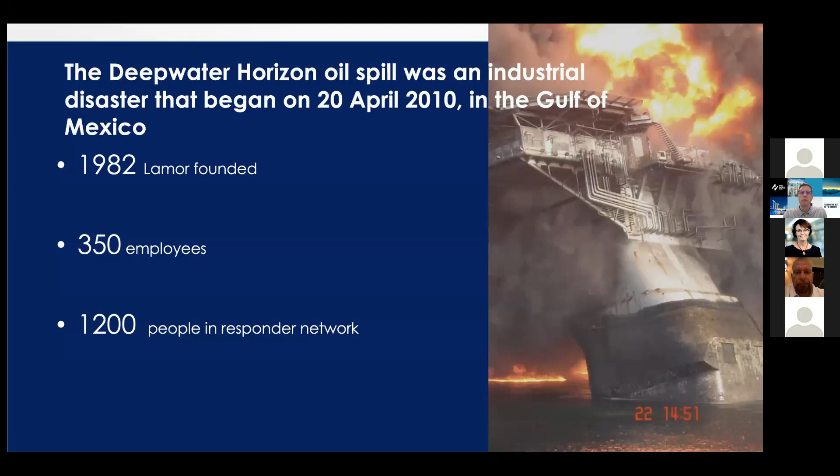River Recycle was established about 2 years ago, and the second largest shareholder is Lamor Corporation, also a Finnish company. Lamor is a global leader in marine oil spill recovery, with references including the Deepwater Horizon cleanup in the Gulf of Mexico. Lamor's team includes about 1,200 people around the world, and it's also an important resource for River Recycle when we need it.

River Recycle's goal is to stop over 60% of ocean plastic accumulation by establishing 500 river cleaning and plastic recycling points on the banks of the world's most polluting rivers.

We have developed a global river cleaning as a free service business model and a system which removes plastic waste from heavily polluted rivers. We clean the rivers of plastic by creating a sustainable circular business that uses the plastic as a raw material. This business model aims to create value for waste in rivers to finance the cleanup.

Waste value creation is achieved by using plastics-to-oil technologies and selling it as a raw material comparable to the current virgin fossil feedstock. During the dry seasons, additional feedstock can be sourced from local landfills and/or by establishing a land-based collection system.

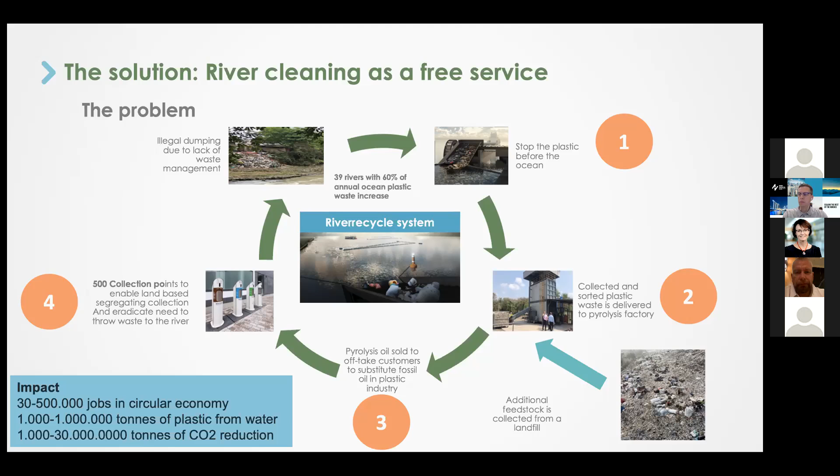Today, the project development of River Recycle covers 9 countries with the help of a dedicated team of professionals around the world. Currently in India, River Recycle is installing a project that will clean up the Mithi River in central Mumbai. The team expects to catch up to 50 tons of plastic waste daily, preventing it from flowing into the ocean.

We are also building a project in the Citarum River, Indonesia. The Citarum River is one of the most polluted rivers on the planet. This river runs through the suburbs and slums of Bandung, and it's partially covered by a plastic layer. The former fishermen will be turned into waste collectors. The project is expected to retrieve between 70 to 200 tons of plastic waste from this heavily polluted river on a daily basis.

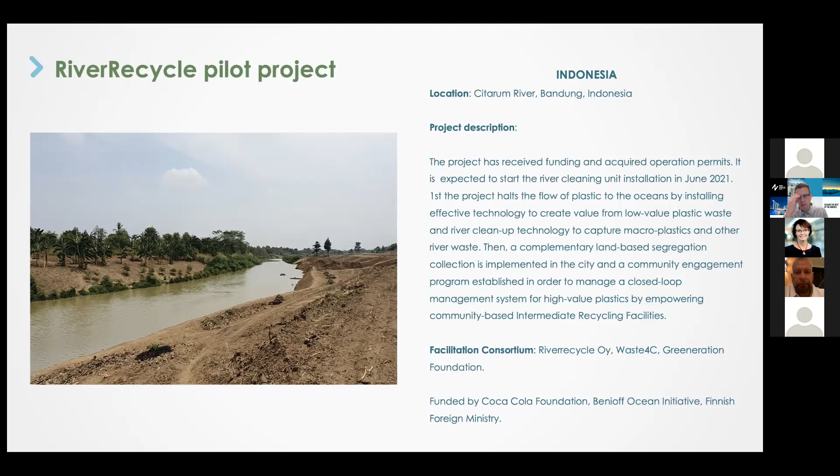So what are we offering for Southeast Asia? We take care of the funding, arrange for the manufacture, transport, and installation of the river cleanup unit; arrange for the installation of the pyrolysis unit with the technology providers; arrange for necessary trainings to operate and maintain the machinery; and also handle the sale of the pyrolysis oil produced.

So what are we looking for? Of course, dirty rivers — rivers and waterways that often have high volumes of floating plastic. There should also be a local interest in the river being cleaner, for example at the national level or local community level, and the river should lead directly to the ocean. That's one requirement, and also extra feedstock.

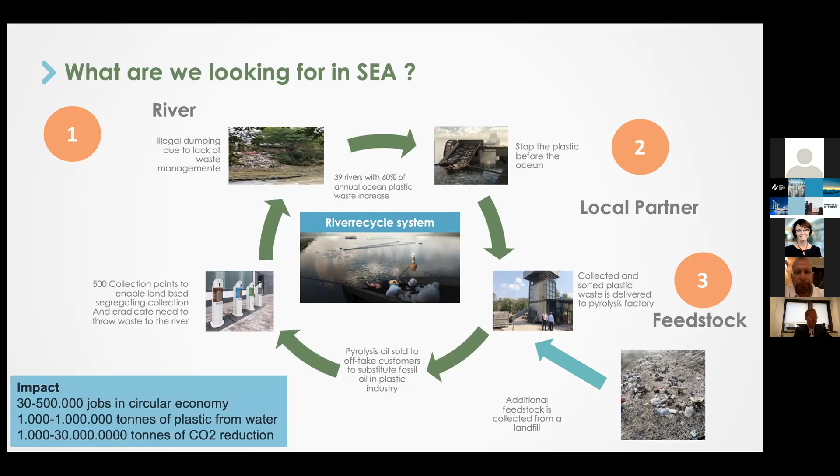Alternatively, we can implement the projects in 2 ways: river cleanup and pyrolysis, or pyrolysis unit only. In Singapore, for example, there are not so many dirty rivers we can clean up, but we could create value in circular economy and waste management, as well as in the field of chemical recycling for Singapore's needs. We have heard that Singapore has a passionate goal to chemically recycle 1 million tons of plastic waste, and our team has a high level of expertise related to recycling as well as petrochemicals. So we are glad to help.

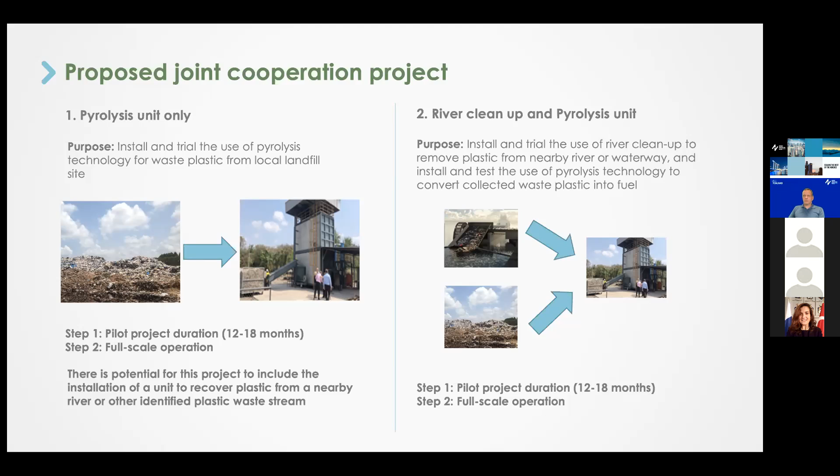So we are willing to develop a pilot project together, for example, and we are also looking for project partners and strategic partners in the area.